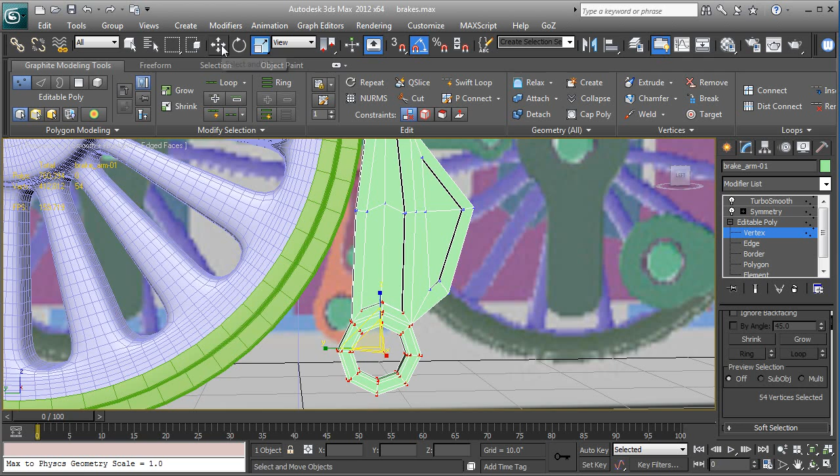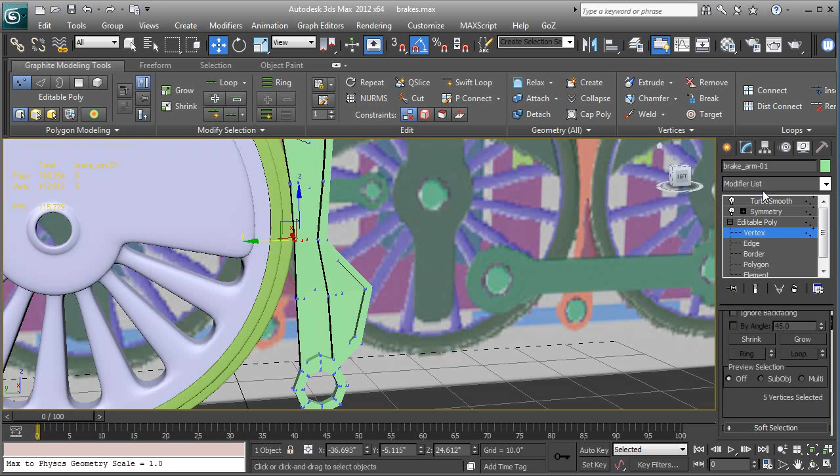That looks better. Then we're going to manually move a few. Maybe we'll take this whole selection here. Let's rotate it and move it a little bit. Just like that. Grab that vert. Okay. Back these out a little bit. Just going with what I think will look best. It's a little better. I think also the top might need to be a little smaller as well.

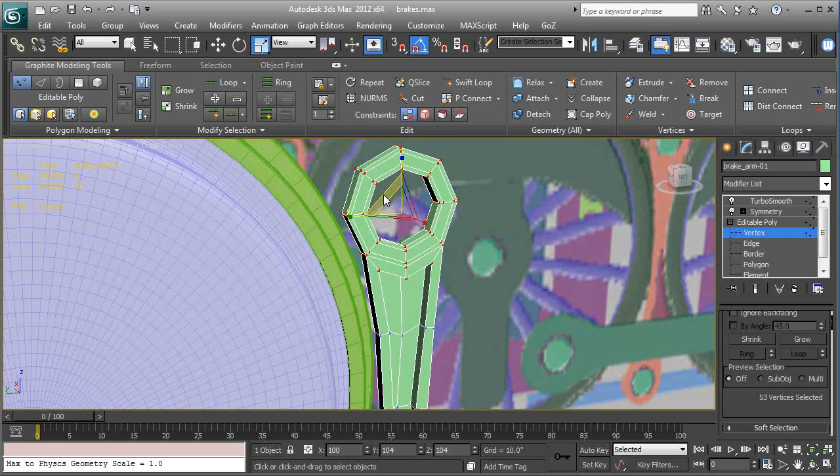So I'm going to select that whole section. Vertex selection, and we're going to scale them down with R, and we're going to use the same handle. Center will scale everything uniform, and you come out here, you have these little yellow bars that show up, and they'll do two directions. So that's what I want to do. I want to do that right there. Okay. Pull it forward a little bit.

Let's go to left and see if these holes are kind of aligned with where they need to be. They're kind of. This one's a little different, but I'm not worrying about that. I think we'll just make sure when the wheel shows up that it doesn't interfere in any way, and then we'll be okay. The other thing is, let's go to border selection. There was a little artifacting at the bottom there, a little black spot. So I'm going to take that border. I'm going to make it planar along the Z.

And turn on symmetry again. F4, make sure that looks good. And it does. And you see there's a little bit of a gap down here in the bottom. I'm just going to go down to border, toggle end result. I'm going to grab this border and I'm just going to move it. And there we go, it's fixed. It has a threshold for the symmetry. Okay, left viewport, let's save it. Control and S to save, or hit the diskette.

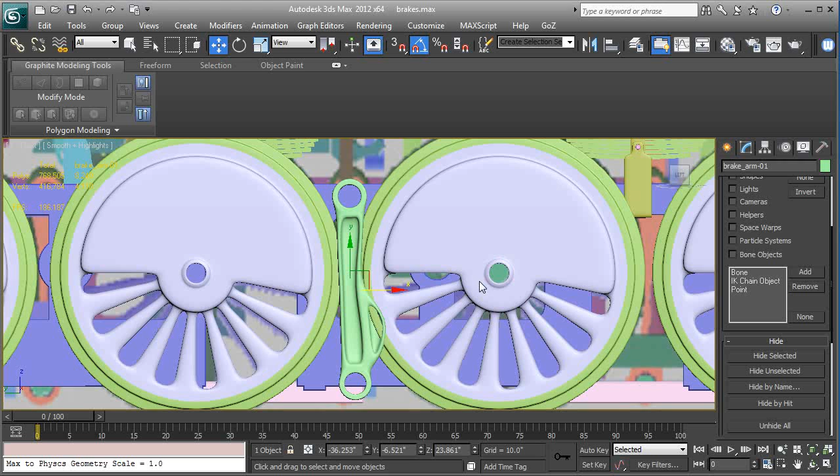I'm going to just quickly unhide all. No. And PZ. Okay. I'll move this back a little bit. You'll see that with the adjustments I made, it's intersecting the wheel a little, so I'm going to do a little rotation. And maybe scale a touch.

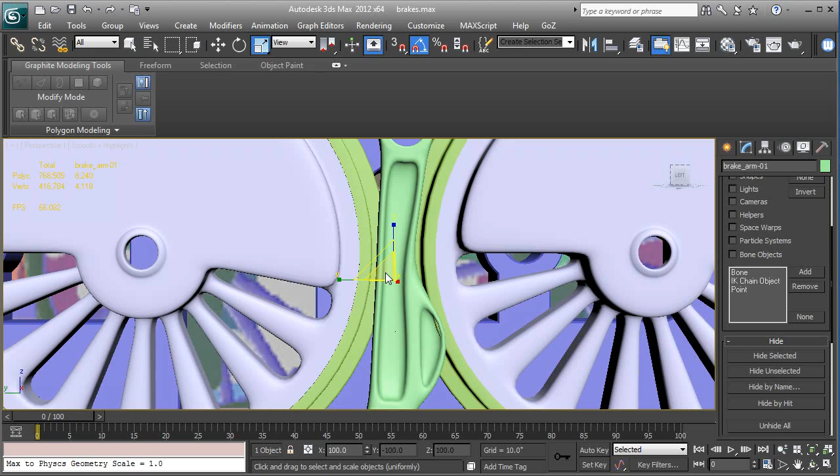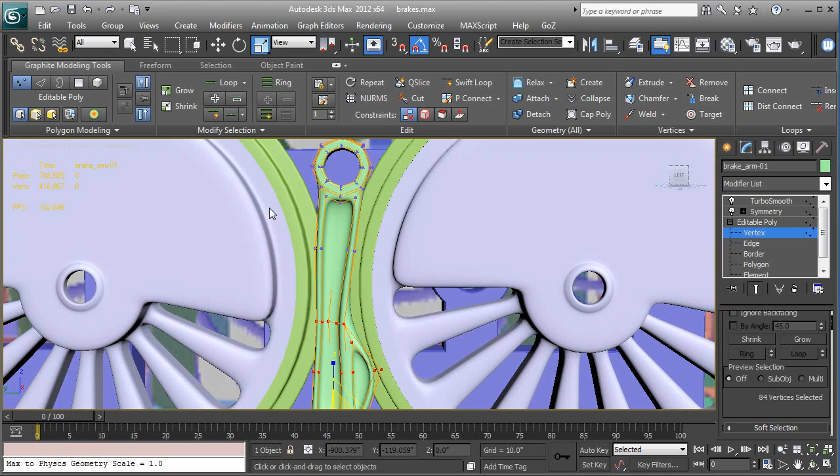Okay. Let's grab this section here. I have show end result toggled on. I'm going to just scale that down, just like that. It's not tragic. I'm going to scale these in a little bit, just like that. Okay. Now it's fitting there pretty good. You'll see we have that black edge again. It's not a big deal. Let's turn off toggle end result.

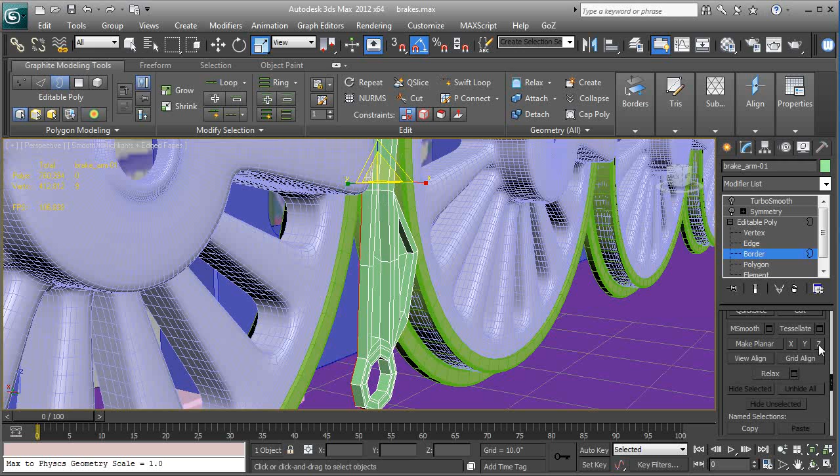I'm going to do a border selection again. Let's grab that border. And planar along the Z. Let's toggle symmetry. And we might need to move that mirror plane. So I click on mirror below symmetry and grab the gizmo and just do that. Turn on turbo smooth, F4. And let's make sure that it's clean all the way around.

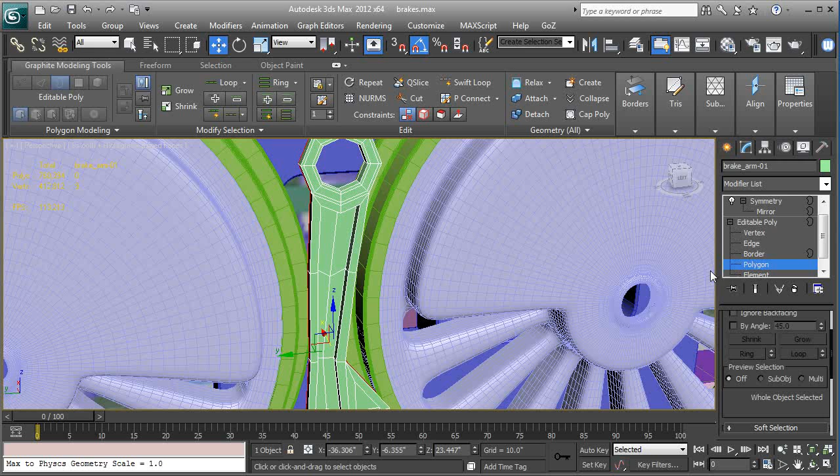It looks good. We have some faces here that may be intersecting. So what we could do is go to polygon, just grab one side, the front facing side, and let's just nudge them out with the move tool. Just a quick edit. Constantly edit yourself. There we go. That looks better. Left viewport.

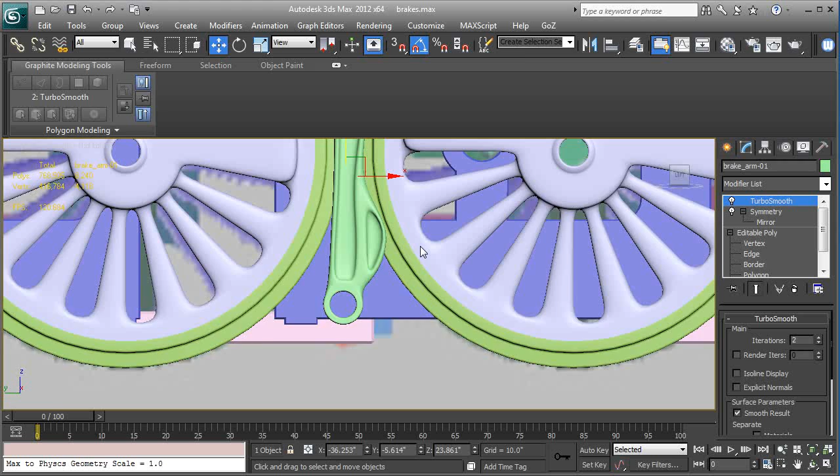And we're going to make a little wedge that meets the shape of the wheel. So let's start out with a tube cap. Why not? F3. I'm going to drag this out from the center of the wheel there, just like that. And I'm going to inset a bit. I'm going to give it a high number of segments. 64.

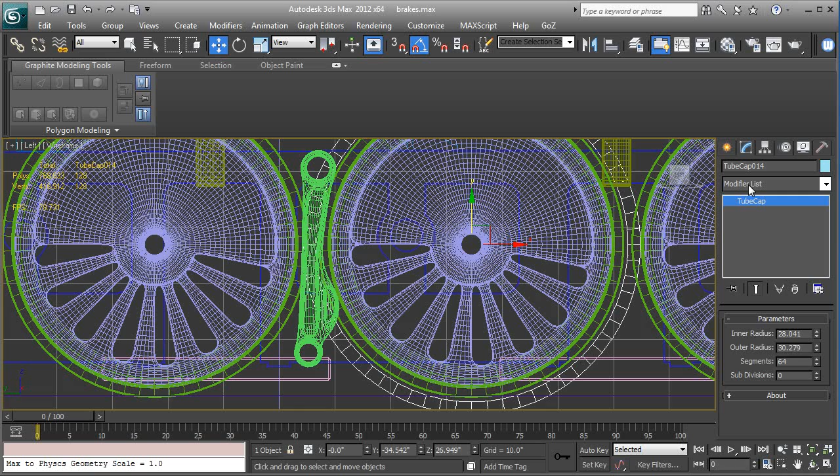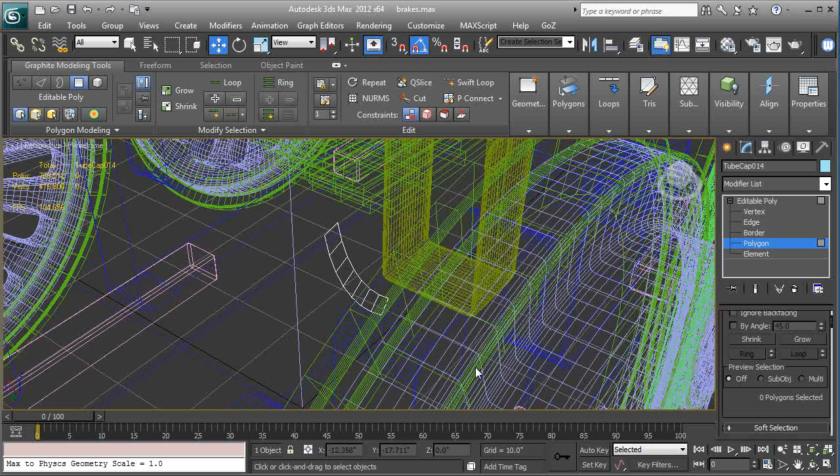Okay. And now we'll convert that to an editable poly. F3. Let's grab some polygons. We're going to just leave enough to cover just where that bump comes off the arm. So I'm going to delete this set of polygons. Let's delete these. Go to perspective. And I'm going to just grab that little selection there. I'm going to pull it out here so we can see a little better.

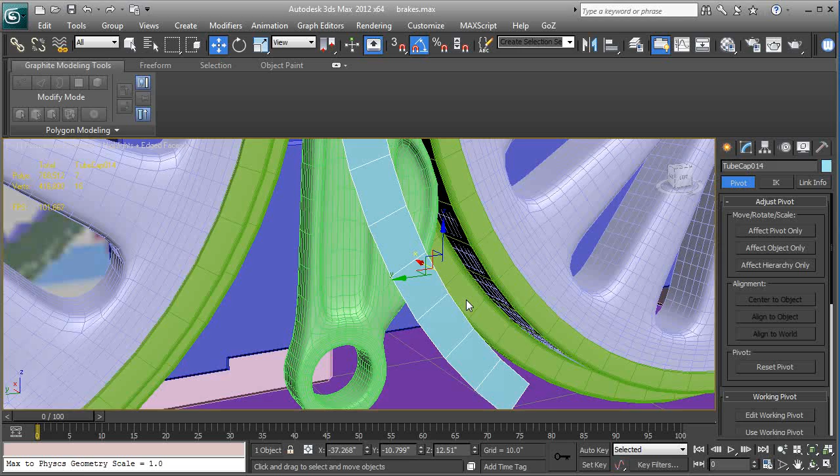Okay, let's affect pivot only. So we're going to go to hierarchy, affect pivot only, center to object, just like that. We have it. Zoom in, F4. Okay, and now I'm going to move this toward the wheel a bit. Rotate it with the E key. You'll get the rotate. There we go.

Okay, and now what we're going to do is let's go down here, polygon. Let's get rid of these two, and we'll keep the rest. So now what I'm going to do is grab some edges. 1, 2, 3. I'm going to hit W for the move tool. I'm going to shift them out. Well, let's drag them, so we're cloning them. Shift drag, just like that.

And now let's try something we haven't tried yet. We're going to grab 1, 2, 3 verts. And I think I mentioned earlier that we can use cap poly when we have a vertex selection. So I'm going to come down here. I'm going to cap that poly. And we'll do the same at the other end. Cap poly. Okay, and that gave us a shape that we're kind of looking for. Let's grab these two verts, Shift and X to get our edge constraints, and let's just move them down just like that. There we go.

Now if you're unhappy about these being triangles at the end, you can do a ring selection, Control Shift and E, and now they're quads. They're just four-sided triangles. Let me move this vert. It'll illustrate a little better what we're looking at. Looking at something like that. So it is a quad. If you want to see a little more squared off, that'll help you envision what we're looking at.

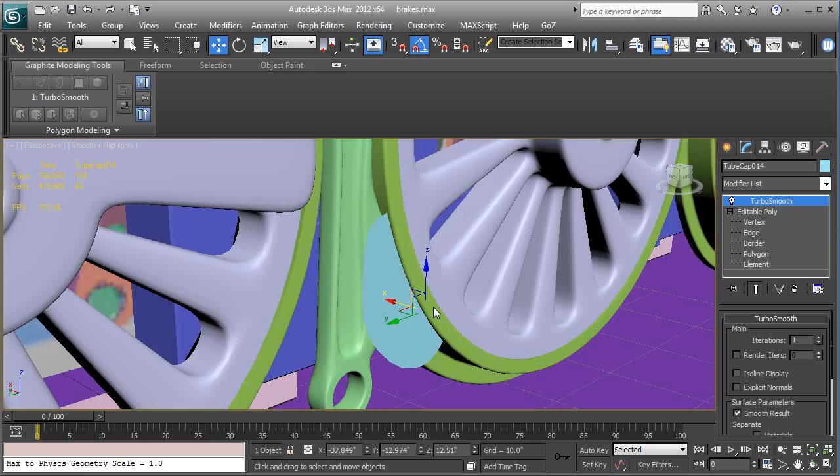Let's go to add a turbo smooth to the stack, just like that. Okay, and we're going to pull it out a little bit. Very good. And now what I'm going to do is below turbo smooth, let's put a shell. Hit S 5 times on your keyboard when you select the modifier list. Let's give it 3 segments, just like that. Up the turbo smooth to 2.

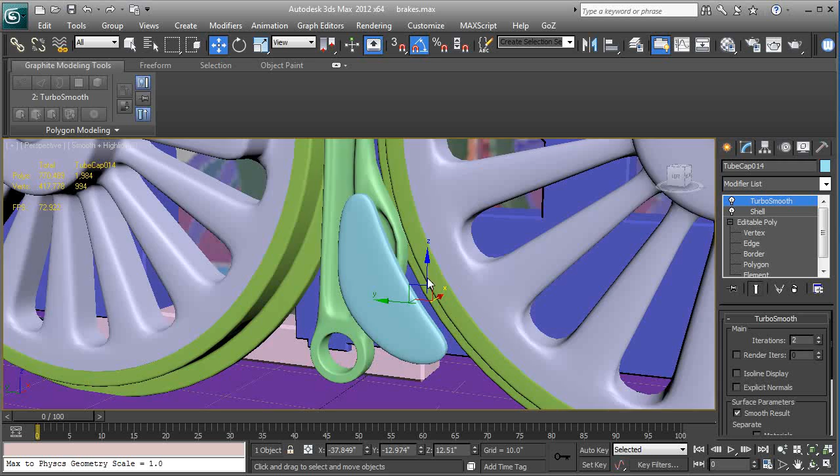Okay. And now what I want to do is go down to vertex. Go to toggle end result. I'm going to grab this one and this one. Let's see if we have our edge constraints still set. If not, Shift and X. There they go. And we're going to just, let's do them one at a time. I'm going to move this closer, just like that. Same thing at the other end, just like that.

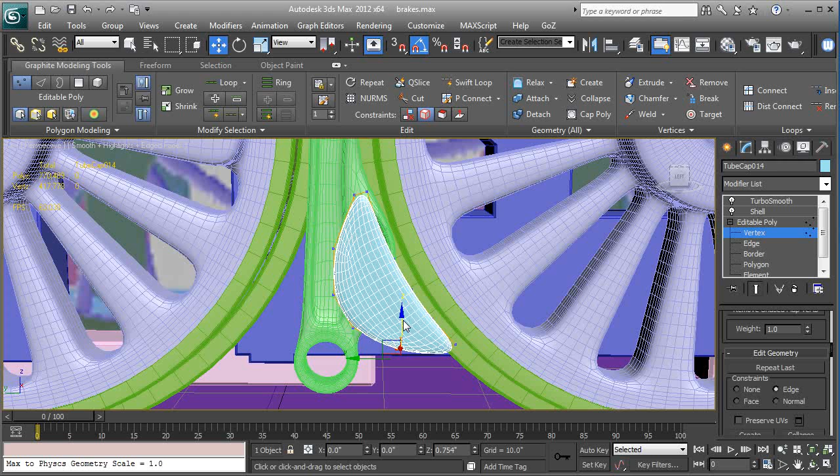I'm manually shaping this, but it helps that I'm seeing the end result. So it's a great way to model. I like to do this when I do organic objects. Just model on the fly with the smooth active so I can see what's going on. And that looks really good. I'm just going to tighten these up. So I'm going to pull them towards each other a little bit, make that a little sharper, just like that.

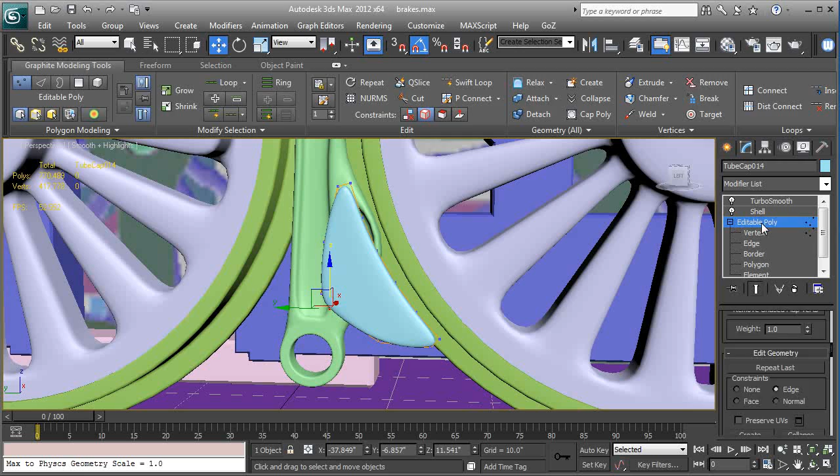Okay, so now what we'll do is we'll make a copy for the back. So I'm going to grab that whole object, shift and drag it back, just like that. Okay, grab this one. Let's grab the outer part of the wheel. So let me hit F4 so you can see. I'm going to select that, and then we're going to Alt and Q. Let's go to left viewport.

Make sure it looks the way we want. I'm going to deselect the wheel, and we're going to rotate those two just a touch so they meet the shape a little better. Let's turn off angle snaps so we can do a little more finesse.

There we go. Okay, let's hit Shift and B, zoom with the Z key, and now I'm going to come into standard primitives. I'm going to create a plane that encompasses those two pieces we just built. I'm going to change those segments a little bit. 8 looks good, and let's do less than 4. Let's do 3. Go to perspective.

Let's move this forward right here, just like that. Left viewport, F3 so we can see a little better. I'm going to rotate this, and move it a little bit, just like that. Maybe scale it, might want a little bit bigger, a little beyond the ends of the wedges we just created, just like that.

Okay, editable poly. Let's get a bend modifier. Hit B on your keyboard, and let's try Y. Y is not it. X. Let's go to perspective so we get a better look.

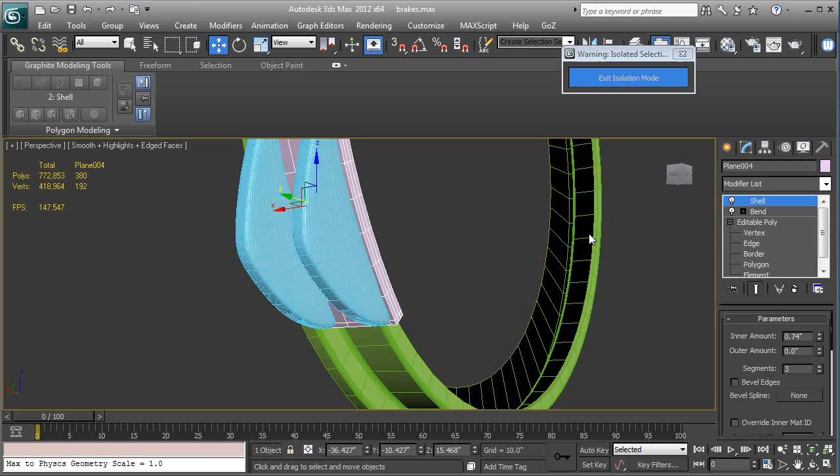F4, and you see that that's still conforming to the shape of those two wedges. Let's add a turbo smooth. Hit T on your keyboard 3 times in the modifier list. And that's the brake shoe.

Let's give it a name, brake underscore shoe-01. And let's grab these two here, 1, 2. F3, make sure we have the right objects. Tools, rename objects, brake underscore mount, and numbered. Rename. Okay, so now they're all named.

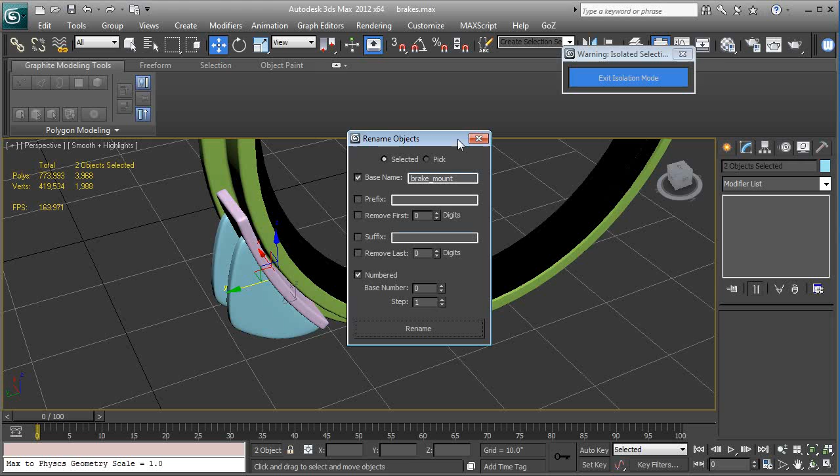Let's exit isolation. There we go. So we have a brake shoe, and it kind of looks like what I'm looking at in the reference. So what we'll do is, I mentioned these pins, we're going to do them in the next video. We're going to add axles to all the openings with the wheels, and we're going to add these little metal pins wherever there's a brake assembly, just so we have the parts we need to pivot on.

And I'll pick it up in the next video.